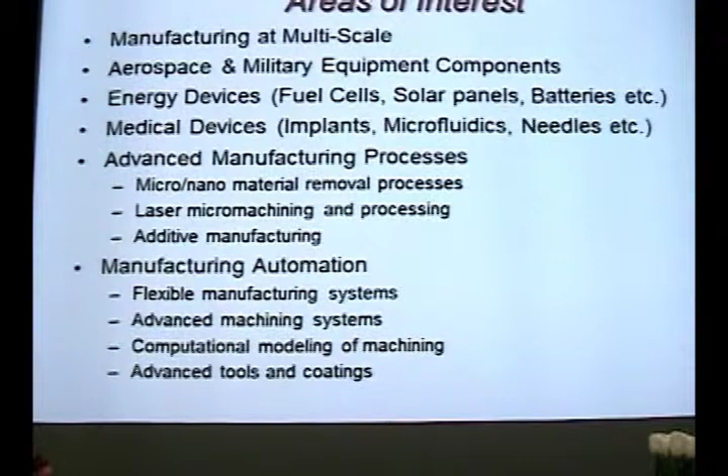Advanced manufacturing technology is a very broad area, but we are focusing on manufacturing, especially multi-scale, nano-manufacturing, micro-manufacturing, and manufacturing at a scale comparable to us.

So that includes aerospace and military equipment components, energy devices, fuel cells, solar panels, batteries, medical devices, implants, microfluidics, microneedles, and specifically we work on developing new processes, understanding processes, developing process models, especially computational models, so that the physics and fundamental science-based understanding of those processes can be generated.

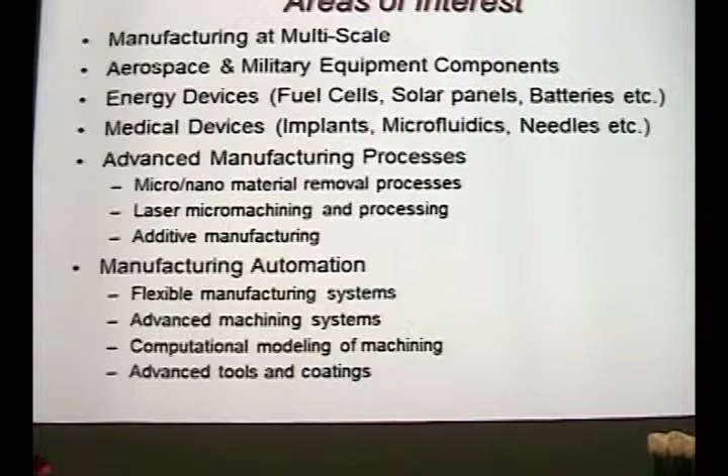So the processes that we are focusing on are micro nanomaterial removal processes, laser micromachining and processing, and additive manufacturing, also known as 3D printing. In addition to those activities, we do manufacturing automation, which is a traditional thrust area in manufacturing systems. It includes flexible manufacturing systems, advanced machining systems, and computational modeling, and also advanced tools and coatings.

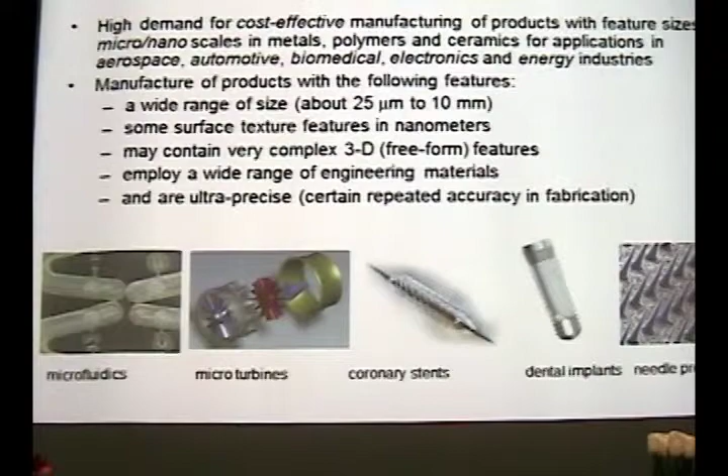So just to give you an idea about manufacturing in multi-scale, essentially we produce products today that are much smaller than we used to produce traditionally for certain reasons. For example, there is a high demand in miniaturization of devices. Parallel to that, there are new materials developed, for example, nanomaterials, nanotechnology, biotechnology, constantly producing new materials.

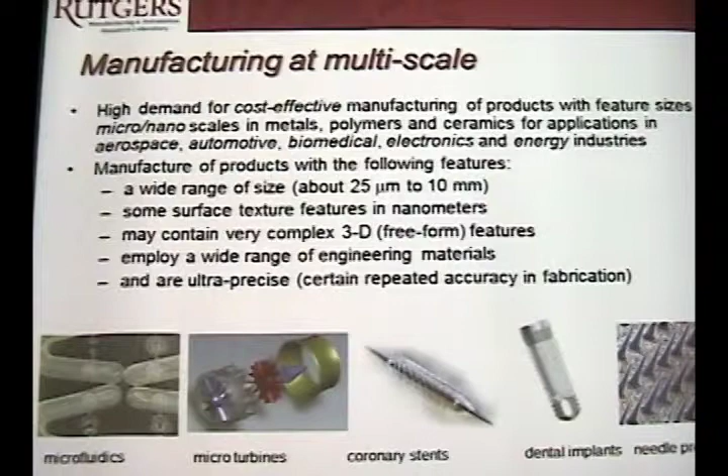So the applications of those micro nanoscale are very, very broad in aerospace engineering, automotive, biomedical, electronics, energy industries. Just to give you some idea, microfluidics devices are very interesting devices where healthcare cost can be reduced, and fighting against diseases can actually be stronger. Other devices include microturbines, coronary stents, dental implants, and microneedles, for example, all require miniaturization.

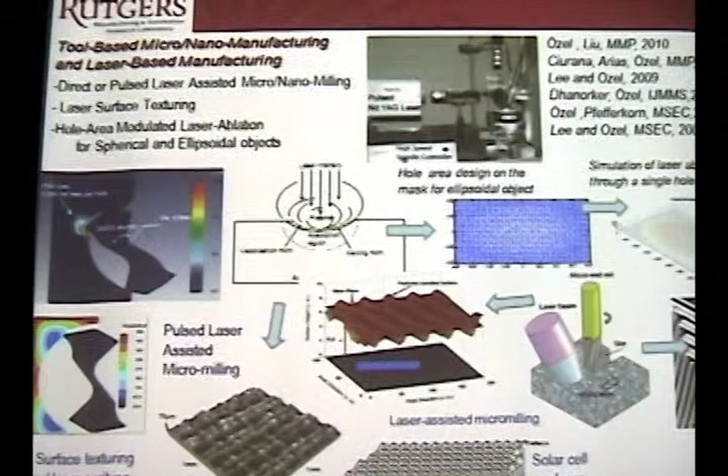So in our laboratory, we focused on developing new manufacturing processes and production processes in fabrication of products to serve those purposes. Just to give you some examples, we have laser micromachining setup, we have micromilling setup, and laser-assisted micromilling setup, and all the features you see here can be produced with such processes. Then we do computational modeling, essentially go to the fundamental science of those processes and understand those processes.

I will skip some of the slides because I have quite many. I don't want to get into too much of the details.

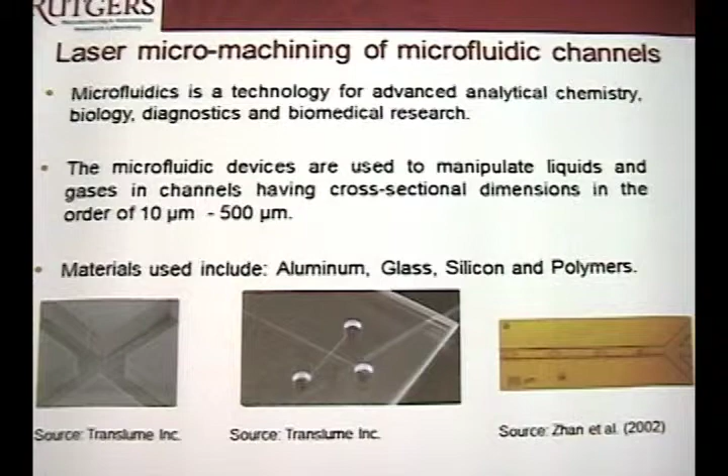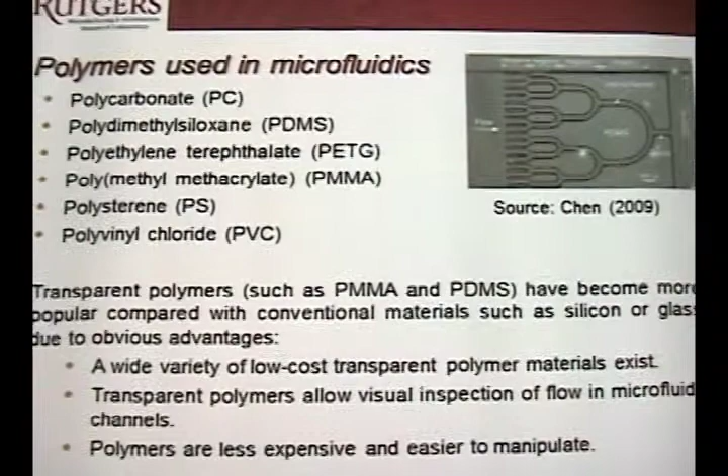Microfluidics can be a one thrust area, in which microfluidic channels can be machined using laser micromachining, for example. You can utilize various kinds of polymers available, and some of these polymers are actually very soft, which provide flexible microfluidic systems.

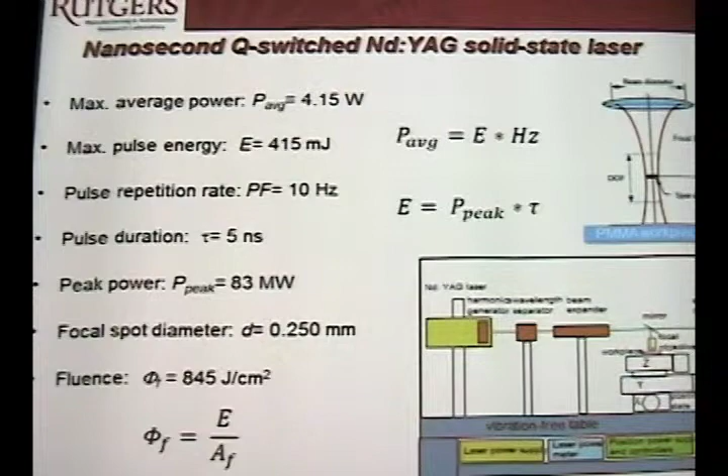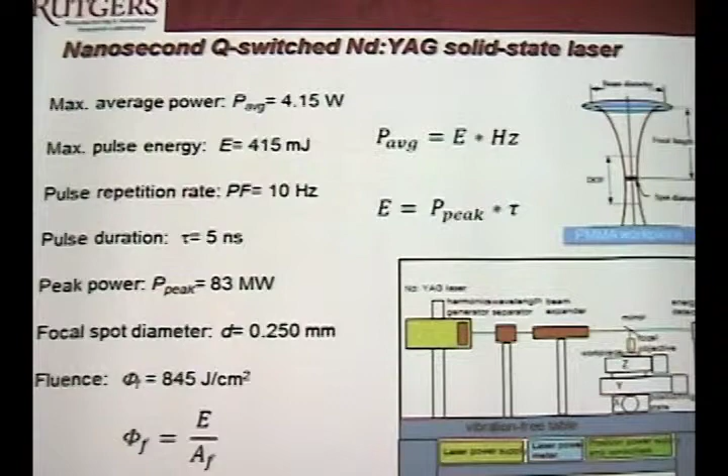So we do modeling of the laser micromachining processes. We use light and laser physics in order to develop computational models in support of our experimental analysis. Those are, for example, some of the results we obtain machining microfluidic channels, and then we construct models to predict that. So in the computational environment, you can actually design the process for various materials.

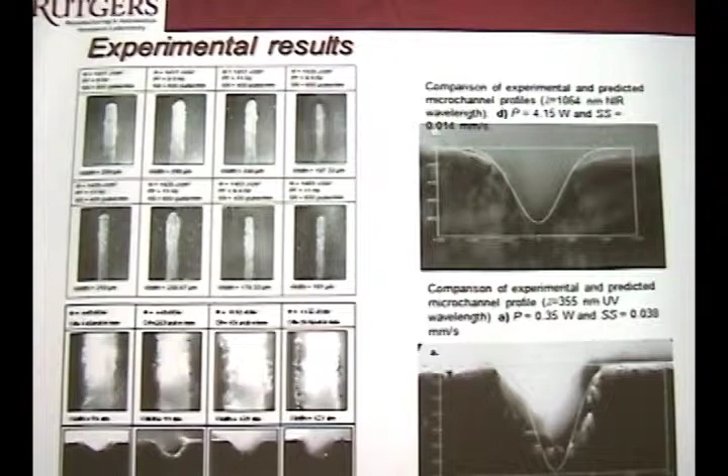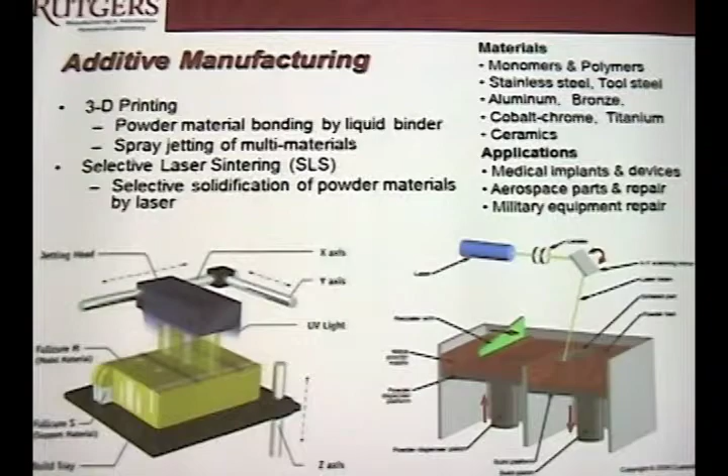Another interesting area we're focusing on is additive manufacturing, 3D printing. 3D printing has been out there for a long time, but just recently, industrial additive manufacturing is becoming a reality. So we took a role in order to study selective laser sintering and selective laser melting.

Our focus is to develop computational models to design the process and understand and improve the process performance and related manufacturing systems. There are various kinds of materials, obviously. We focus on materials useful for aerospace and biomedical industries, such as nickel-based alloys, titanium alloys, and others.

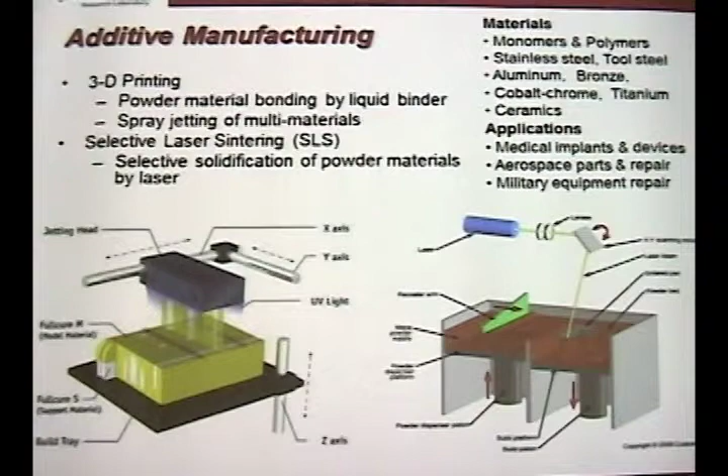Another innovation aspect of our research: we focused on developing, with micro-machining processes, prototypes that can be used to generate a new product, especially in healthcare delivery systems. So microneedles, as a concept, are an alternative to hypodermic needles, where you don't have a sharp, long metal piece going into the skin.

There are tiny little needles in an array fabricated on a polymer, and the polymer also has the necessary drug in it. Rutgers technology is patented, and we have a patent for developing these microneedles out of two different polymers that we tried, and there are some other competing technologies from other universities.

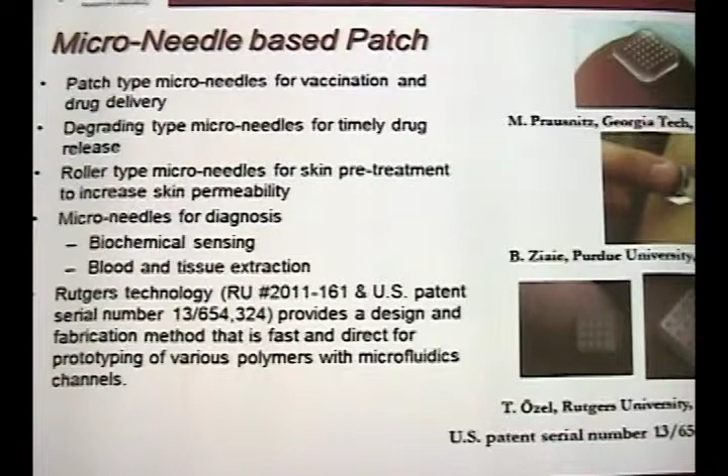As a result, we developed an innovative manufacturing process and product, an integrated system that will allow us to fabricate these very small microneedles. This is the development stage. We started out with computer design, and then we developed the process.

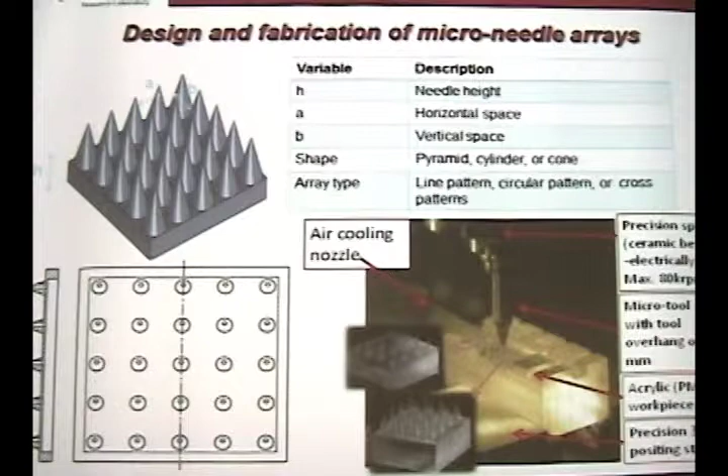We fabricated some different prototypes, and they are ready to be tested in some drug delivery systems, for example. Here are some example images of those fabricated microneedles.

In addition, we explored new processes to fabricate this, because when it comes to mass scale manufacturing, we should reduce the cost of manufacturing. One of them is 3D printing. So these are the 3D printed prototypes of the microneedles.

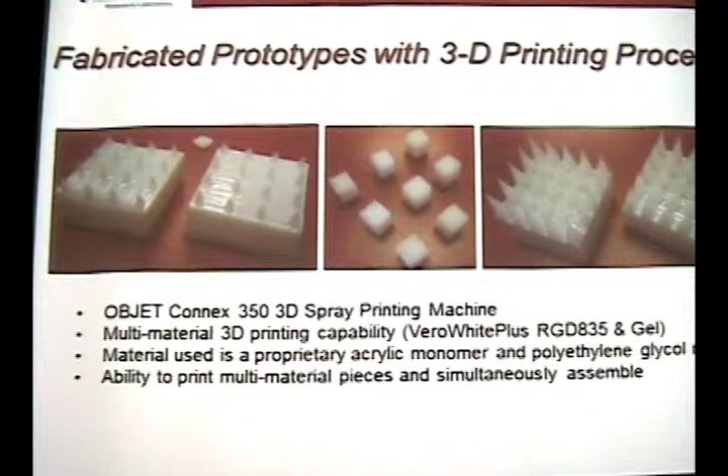This is useful for timely release of drugs, and it could be useful for fighting against diseases such as malaria, with self-applicable applications. So we're currently seeking some industrial partners to start business in this area.

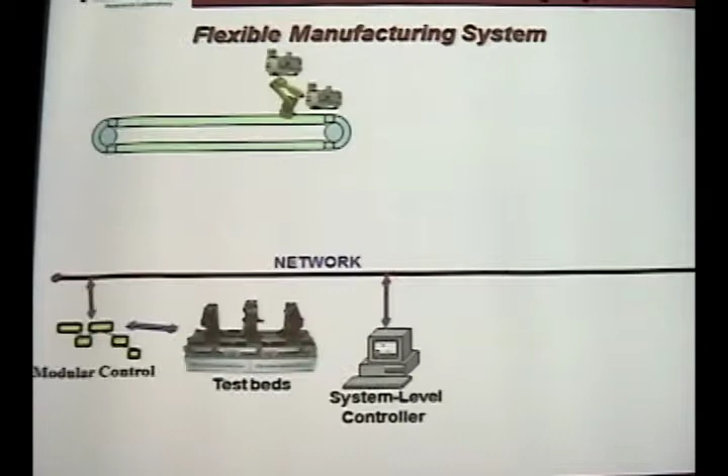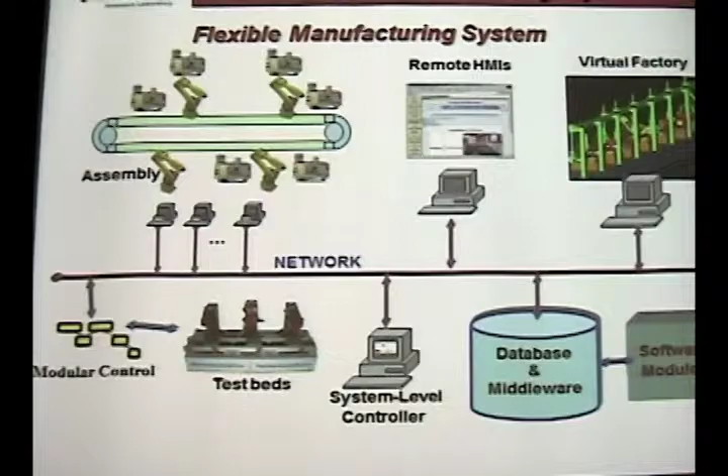Another group of activity we do is manufacturing automation, focusing on traditional manufacturing systems and how we can model, optimize, and generate automation strategies. In my department this is a traditional strength, which we call automation altogether. In my group particularly, we focus on flexible manufacturing systems.

We try to develop computational models that would actually mimic the actual process and improve process automation. Here is a chip removal process, or metal cutting process, in which we develop and validate experiments, and then try to understand the resultant product attributes such as surface integrity, structural integrity, part quality, etc.

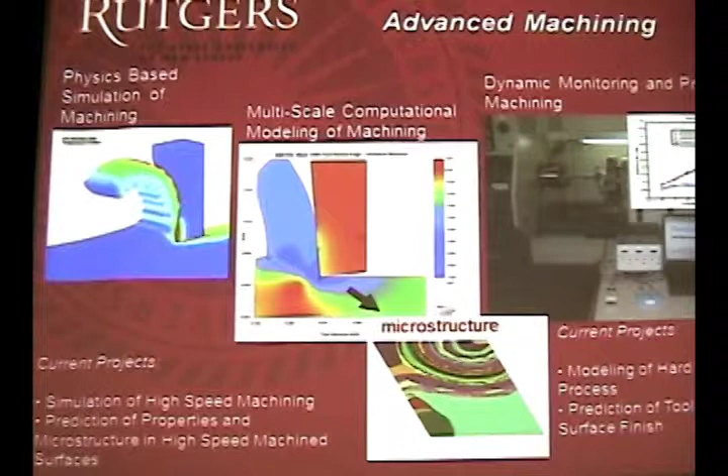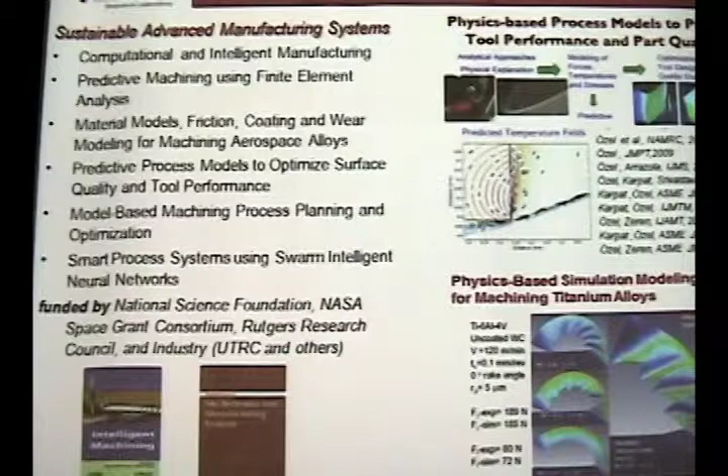So these are some representative images. And in these, actually, we have a lot of activities that two of the PhD students finished their work. The first PhD student worked on this, as you can see from the papers, Yiğit Karpat. He is now an associate professor, just recently promoted, in Bilkent University Industrial Engineering Department.

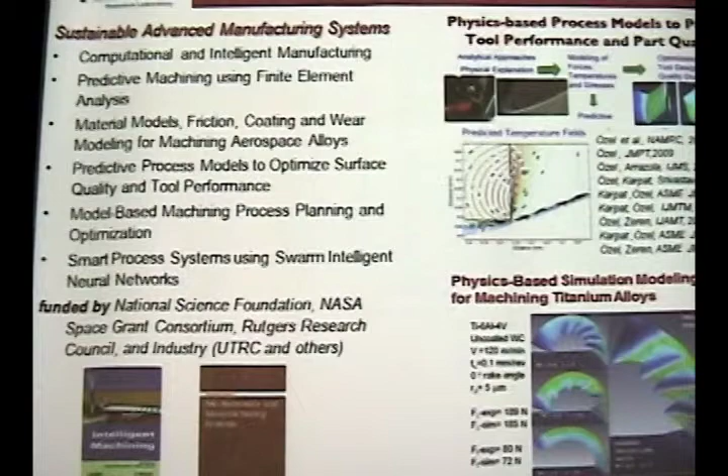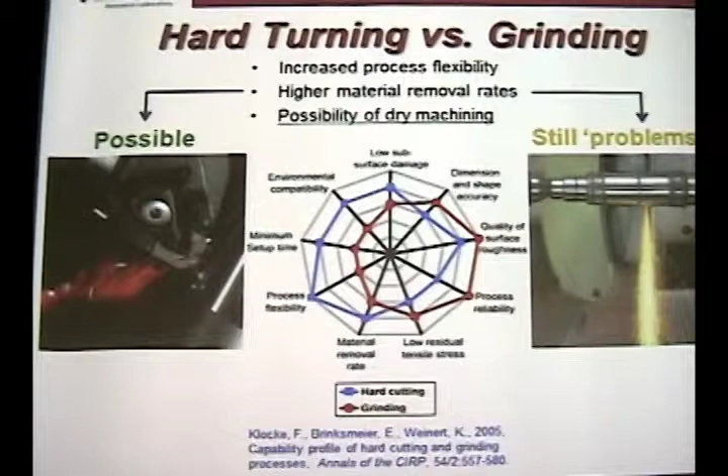Another PhD student worked on this and finished. Erol Zeren finished last year. He is a postdoc at Clemson University. Yiğit Karpat has studied, for example, hard turning. This process is a green, environmentally friendly process because it eliminates using lubricants, so it's a dry, environmentally clean manufacturing process.

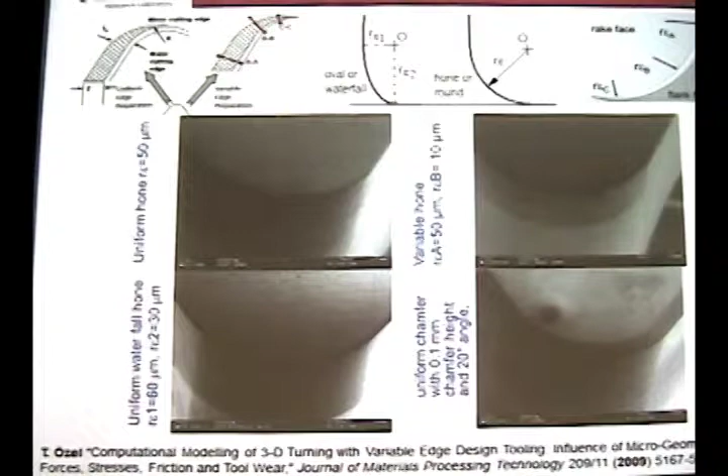So we developed process simulations again, and then provided process improvements. And at the time, we also developed some new tool geometries we call microgeometry, and optimized the tool geometry to improve and also optimize the process performance.

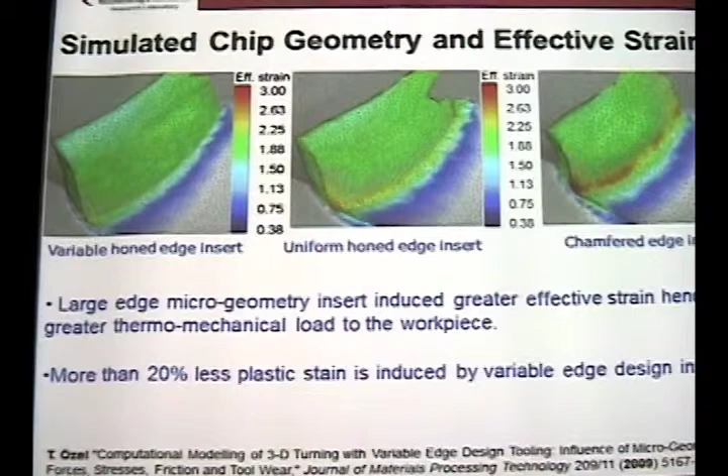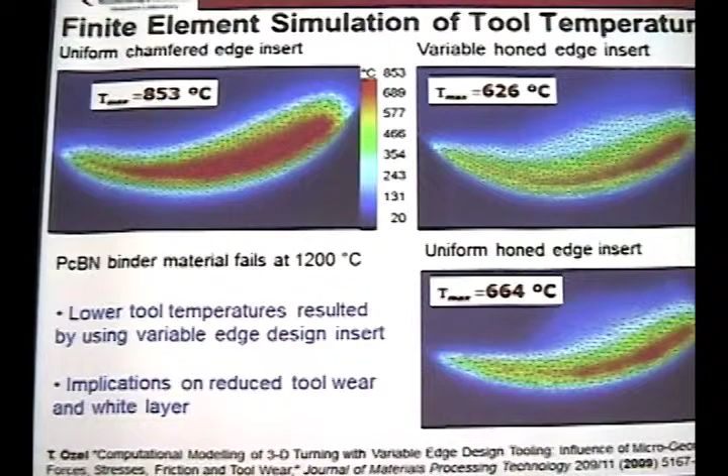And we are continuing that effort in order to generate more computational models to predict the microstructure, especially of components that are important in fabricating aerospace parts. And then we can specifically predict temperatures at a very small scale and quite accurately, which is very difficult to measure.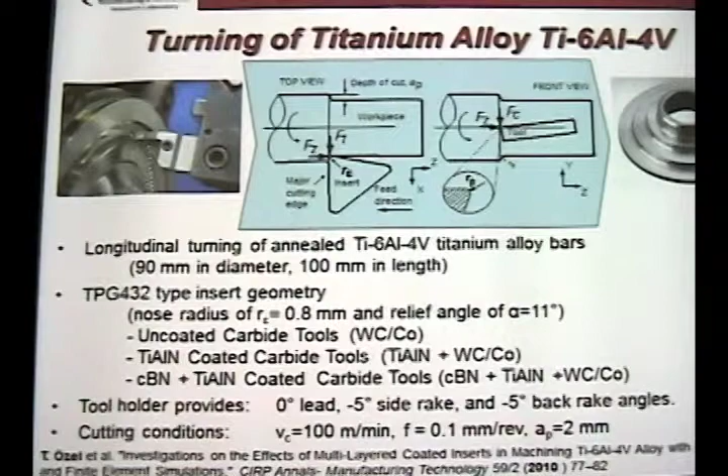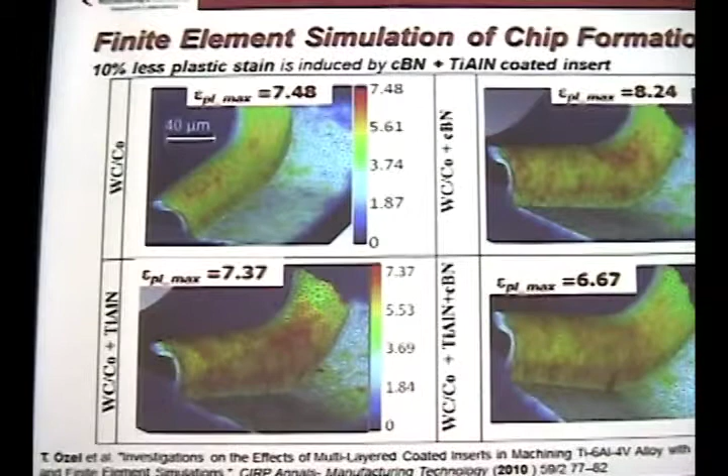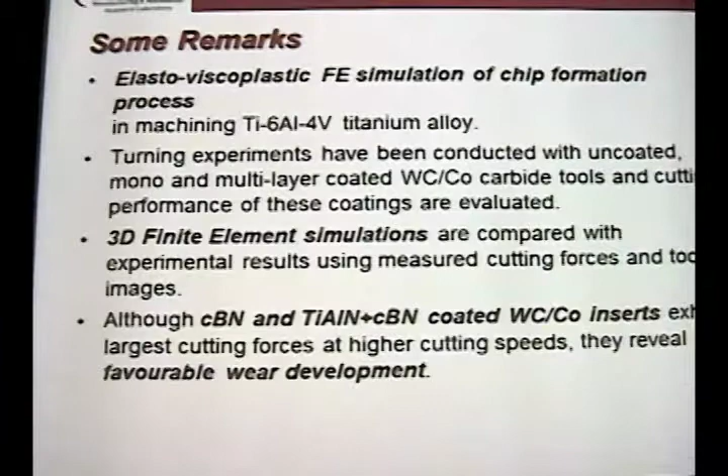So another project that we are working on is machining titanium alloys, in which we're actually looking at the process modeling again. We use advanced computational constitutive material models, and then we developed chip formation simulations using the finite element method. From this, we can predict the temperatures during machining, and then optimize the process performance.

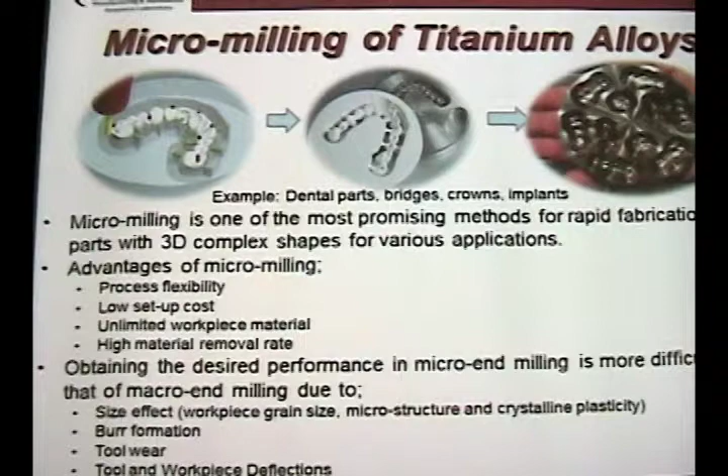Another activity: we're focusing on micromilling of titanium alloys. Micromilling titanium alloys can produce, for example, dental parts, bridges and crowns and implants. And in the future, they're thinking about having micromilling machines work on your dental operations, automated. So the process knowledge is very important in that respect.

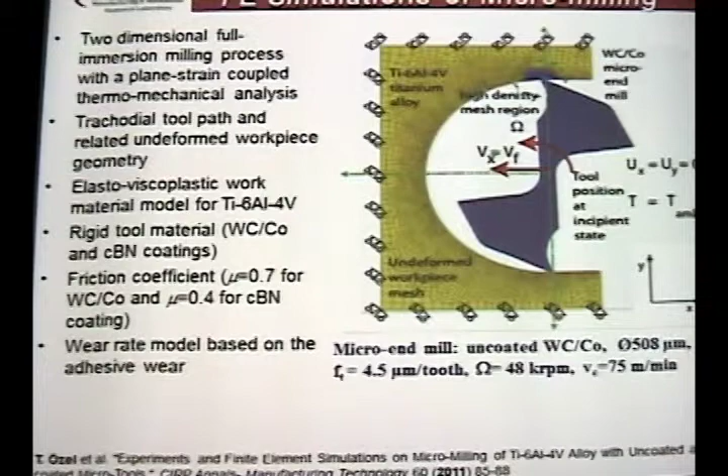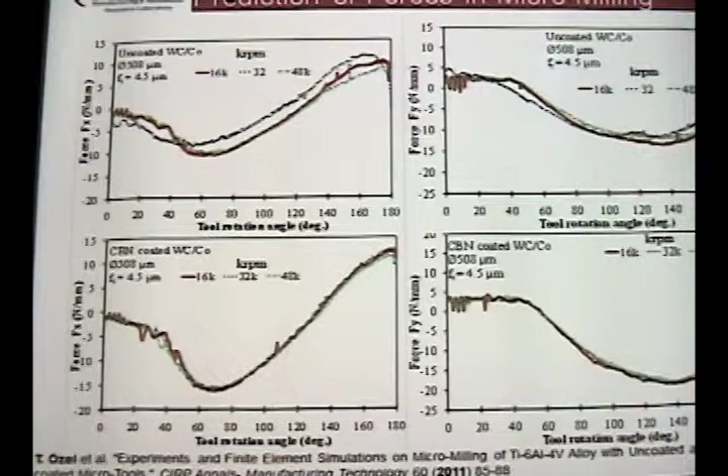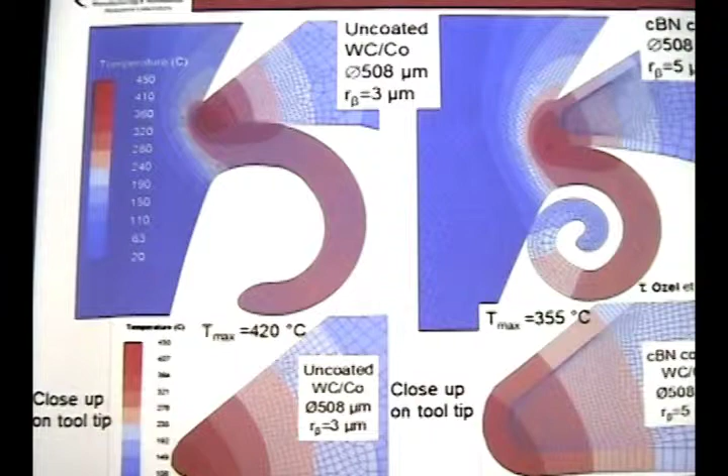We have micromilling experiments and then micromilling finite element modeling. And as a result, we can understand the process model. And I think we have a movie here, hopefully it works, but it didn't. Then we can predict process outputs such as forces and temperatures and strain on coated and uncoated tools, from which we can generate some knowledge which is applicable to optimize the process.

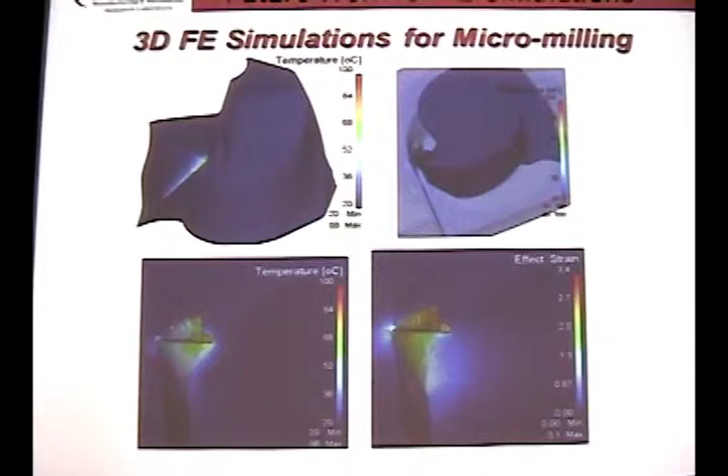And as a last item on that is 3D finite element simulation modeling, and you can see those computational models are very large. It takes a very long time to run them.

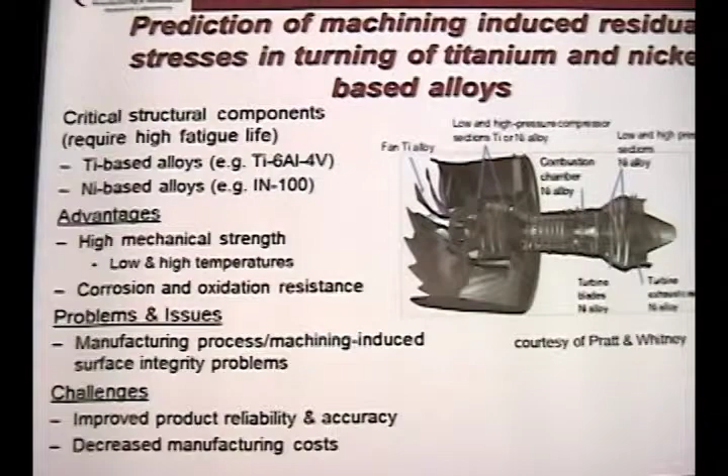Finally, the last project I'm going to talk about is machining-induced residual stresses and surface integrity on aerospace alloys. So you can see that an aircraft engine has lots of aerospace alloys, titanium and nickel alloys, and they are mission-critical components. Their life cycle is very important. And then we look at processing of those materials in order to make the final products, in which we understand the residual stresses. And we conduct experiments.

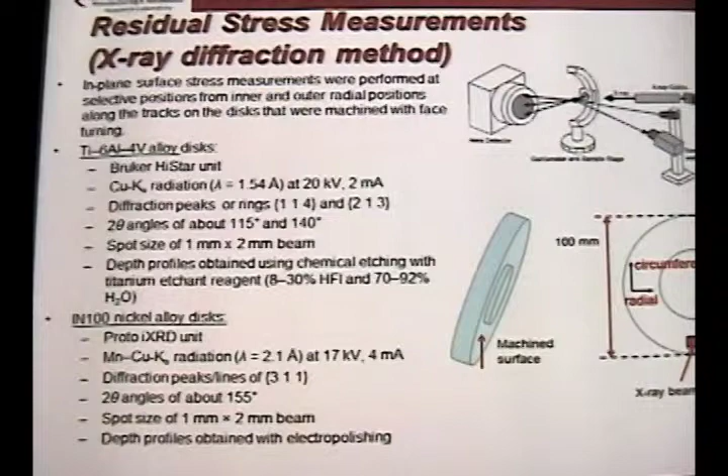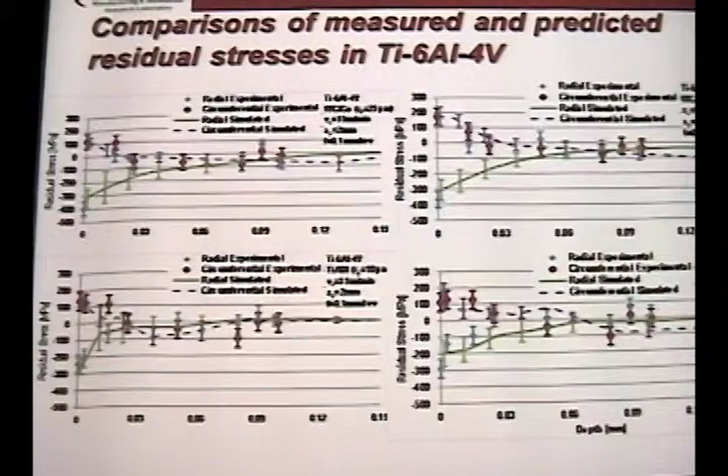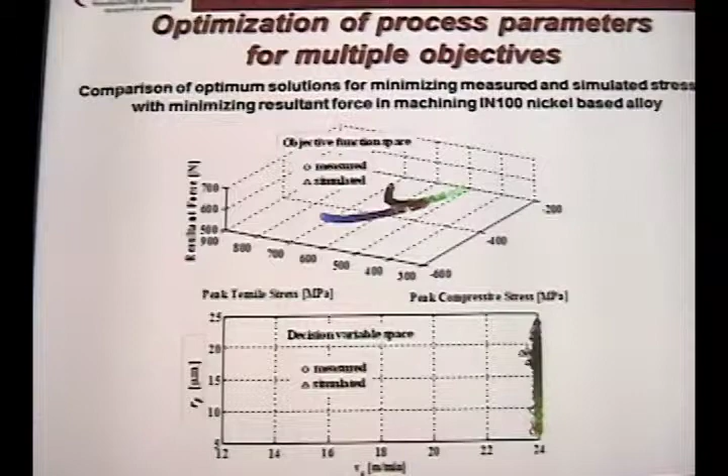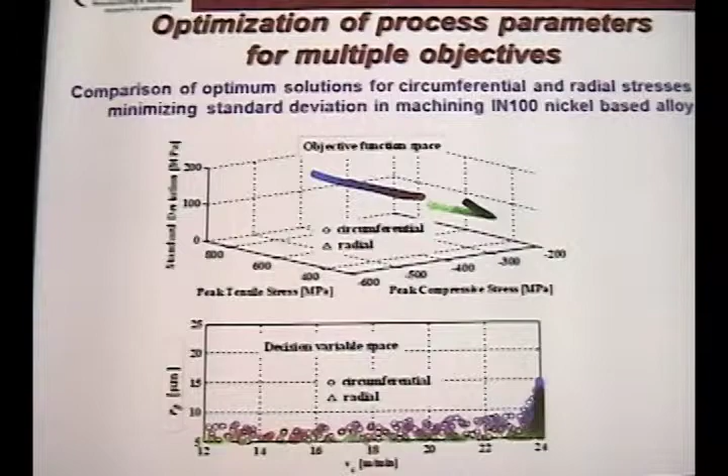From the experiments, we measure residual stresses, and from this, we develop finite element simulation models and predict residual stresses in the part. Then we try to develop optimization schemes and look at what is the most desirable machining or manufacturing process parameter set in order to find an optimum set of solutions. So we use a lot of computational methods to do that. One of the methods we use is particle swarm optimization, for example.

So as a result, working in a university as an academician requires doing a lot of research. I just wanted to run through many research projects. Obviously, they are too technical for this audience and maybe our audience over the internet. However, you can see that if you're interested in pursuing careers in the manufacturing systems area, these are possibilities.

So as a result, if you want to become an academician in the university, this is a very nice, beautiful, very enjoyable career. You get to work with many wonderful people, teaching, research, going to conferences, advising, editorialship, writing books. I love my job, and I recommend it to anybody who wants to pursue a career in academia.